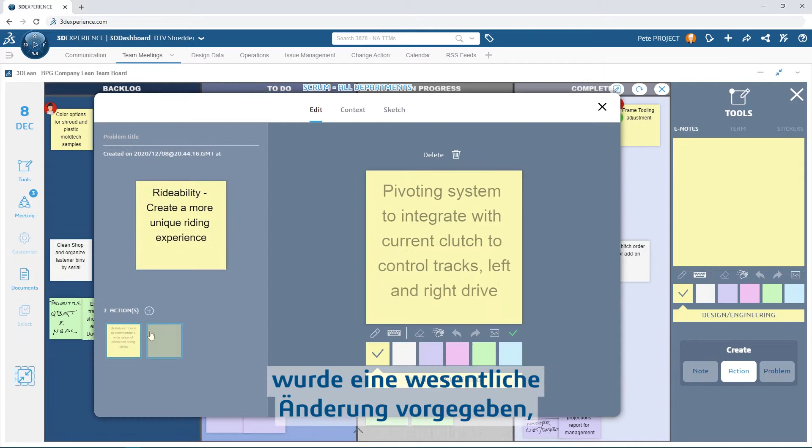During the team's most recent design meeting, a major change had been presented, challenging the team to incorporate a more unique rider experience. This change removes the current steering controls through the handlebars and moves the input to the rider's feet, giving a true skateboard feel to the shredder.

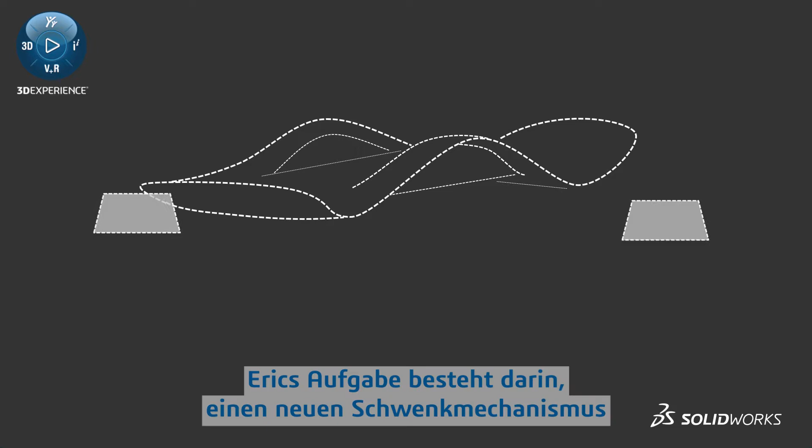Eric's task is to assemble a new pivot mechanism, along with a connection and adjustment system to engage the left and right drive clutches. Let's see how the power of SOLIDWORKS assemblies speeds through this process and ensures the new steering control system works flawlessly.

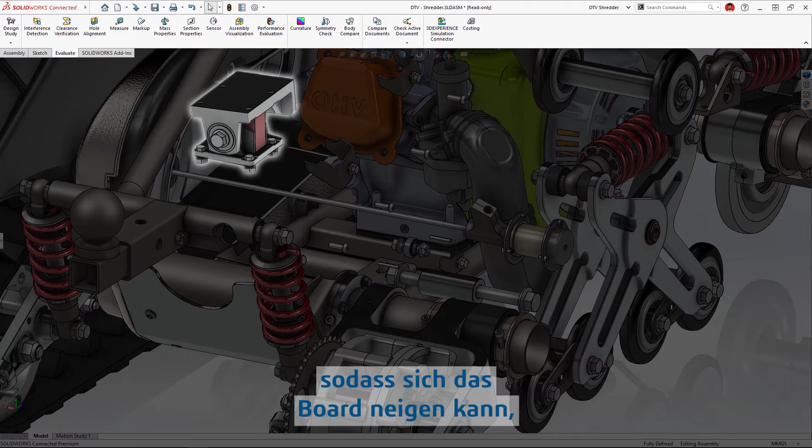We catch up with Eric after he's already created the steering truck mechanism that allows the board to lean and the push rod assembly that controls how much power is being delivered to each track, which steers the shredder left and right. Now, Eric's job is to figure out how to translate the rotational motion of the steering truck to control the linear actuation of the push rod.

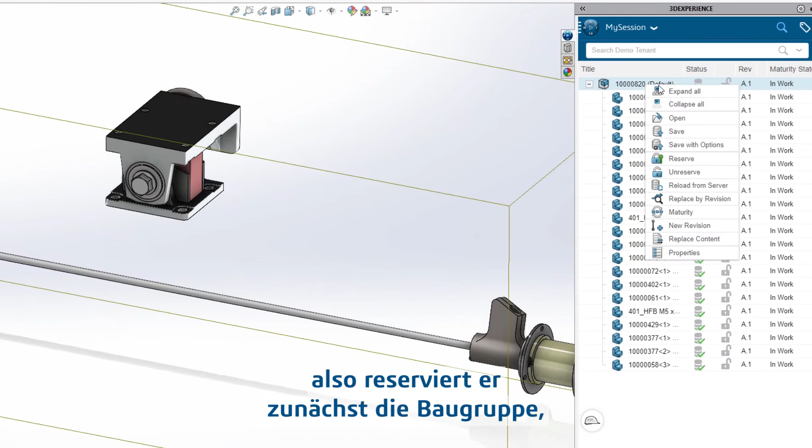He'll be making changes to the design, so he starts by reserving the assembly, since he doesn't want to step on anyone else's toes in the process. In a previous project, Eric used a tie rod assembly for a similar mechanism, so he does a quick search in DTV's cloud library on the 3DEXPERIENCE platform. He can see that there's a few sizes to choose from, so he'll go with the 170mm tie rod for now.

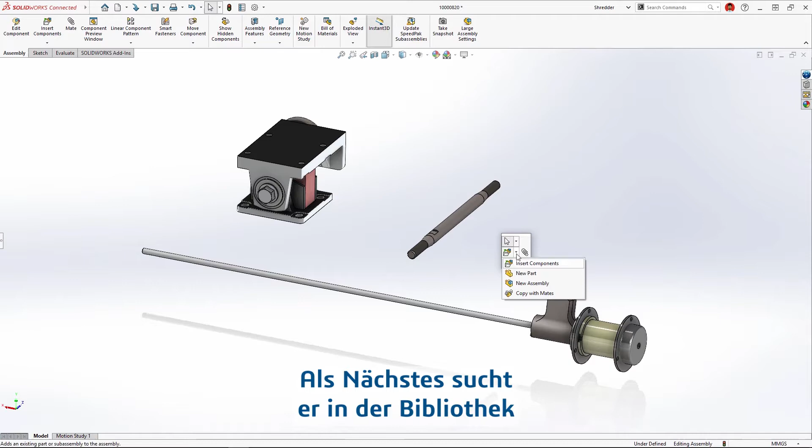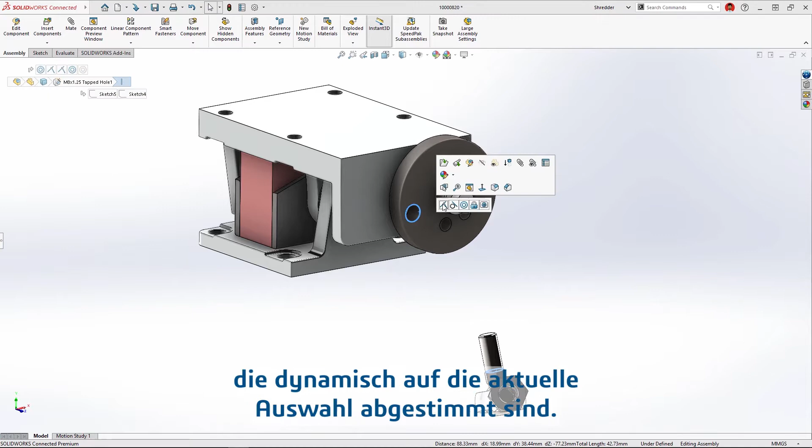Next, he searches for a spherical hinged tie rod end in the library as well. He needs one of those on each end, so he makes a quick copy. Now to assemble the rod end to the steering truck. By clicking two circular edges, the QuickMates toolbar gives him mate options that are dynamically tailored to what he's just selected.

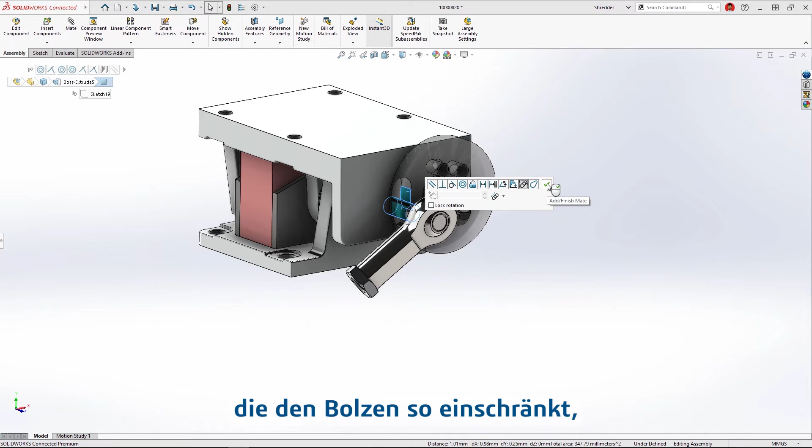By making the adjustment wheel transparent, he can now click the cylindrical face of the rod end stud and an inner face of the curved adjustment slot. SOLIDWORKS QuickMates presents him with the slot mate option, which will constrain the stud to only be able to move within the limits of the slot.

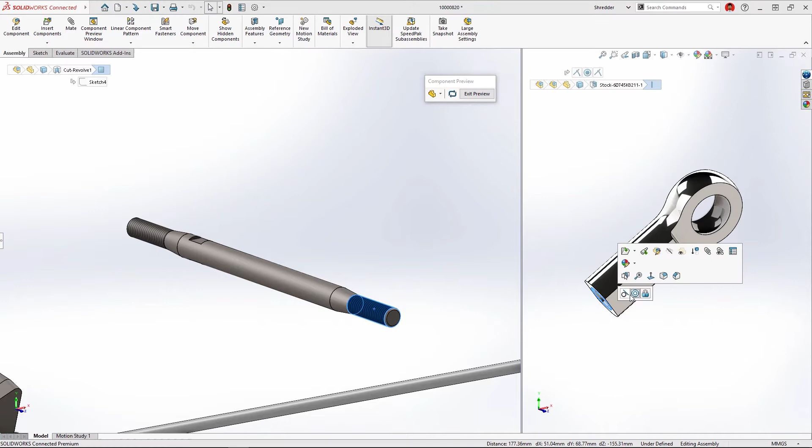For the next pair of mates, he knows that he'll need to have access to a few small internal faces of the rod end to mate it to the tie rod. By using Component Preview, he can rotate the rod independently in its own window, while the rest of the assembly stays put in another window. The coincident and concentric mates are done in a snap, without having to move and rotate the assembly around, searching for the right faces or edges to click.

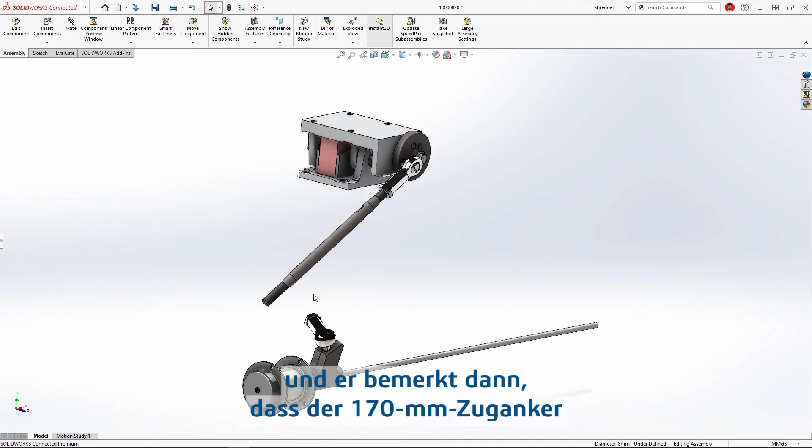Moving on to the lower rod end, he mates the stud to the push rod assembly and then notices that the 170mm tie rod is just too short for this application. He changes the configuration on the fly and uses Component Preview on the lower tie rod end to finish mating the tie rod assembly in place. Testing the mechanism, Eric can see it's working just as he had hoped, but knows that it'll need to be tuned to ensure proper function.

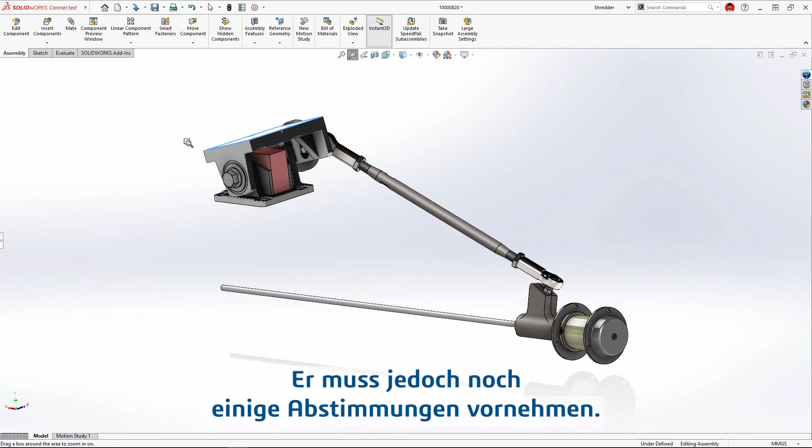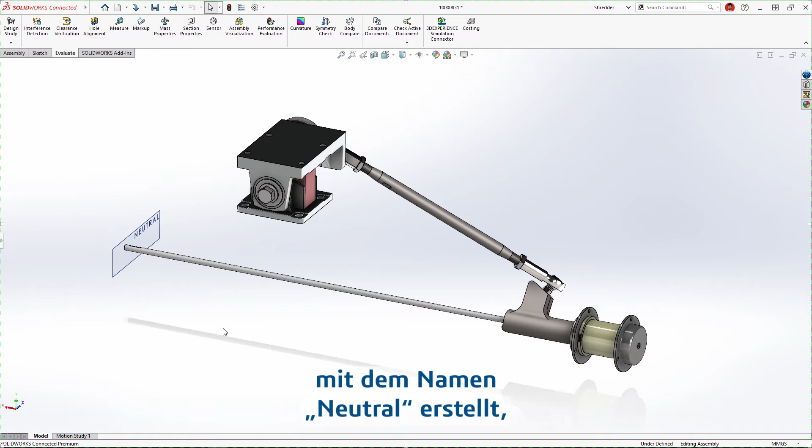He adds a limit angle mate to the steering truck, giving it plus and minus 15 degrees of rotation. At the center position, the end of the push rod will need to be right between the left and right drive clutches, giving equal power to both tracks, making the shredder go straight. Eric had previously created a plane called neutral, which identifies this center position.

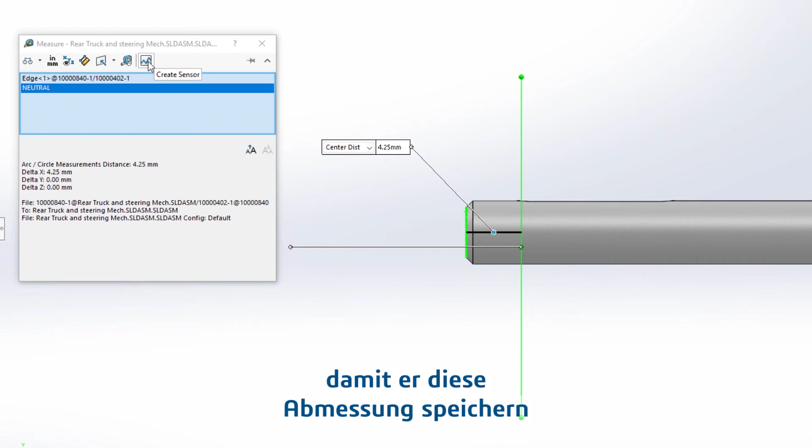By zooming in on the end of the push rod, he sees that it's too long, so he uses the measure tool to measure the distance from the end of the push rod to the desired neutral position. It appears that the push rod is 4.25mm too long. Eric creates a sensor so he can save that measurement and access it at any time in the future as the design changes. He quickly changes the overall length of the push rod by adding a simple math equation to the dimension field, ensuring the length will be perfect.

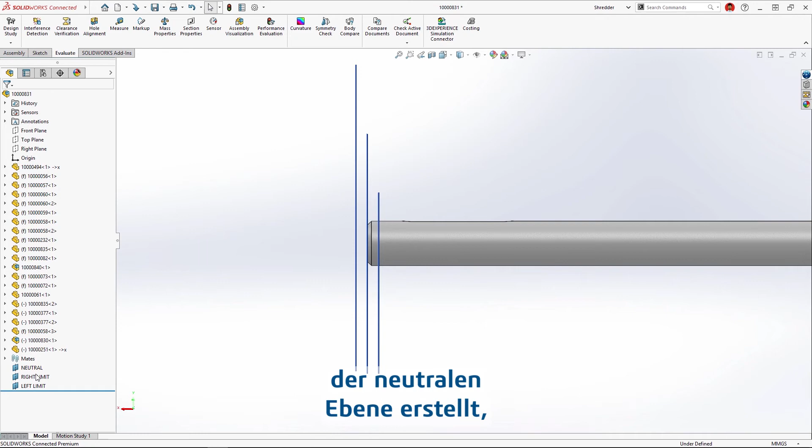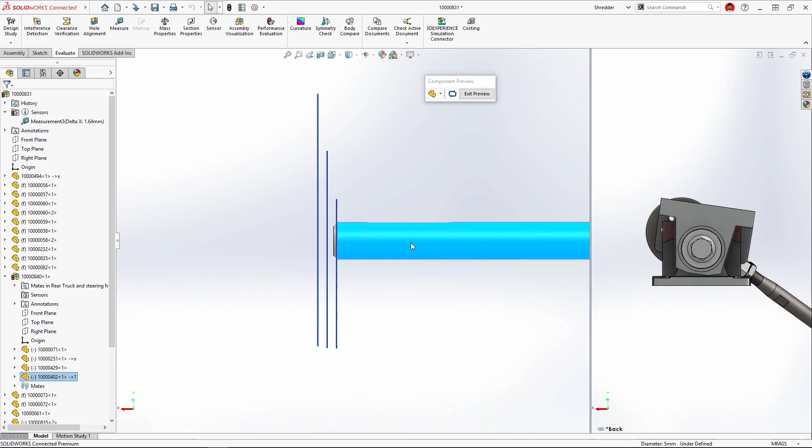Eric had also created two additional planes, 1.25mm on either side of the neutral plane, which correspond to a hard left and hard right turn. He opens the sensor he just created and moves the push rod through the entire range of motion. Eric can see that the end of the push rod comfortably hits the turning limits and is beyond the 1.25mm specification. Without building and testing a single prototype, Eric developed a mechanism that'll control steering by simply leaning on the board.

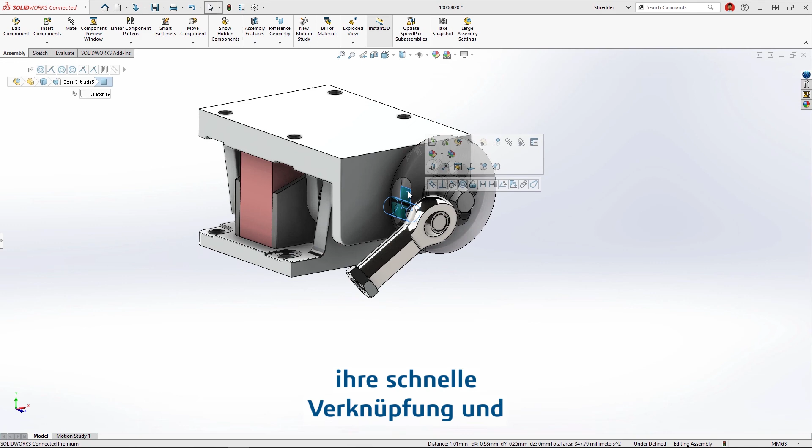Finished with the steering mechanism, Eric unreserves the assembly and saves his changes to the cloud. By reusing parts in DTV's shared cloud library, quickly mating everything into place, and virtually testing its function, he was able to tackle this tough challenge with ease.

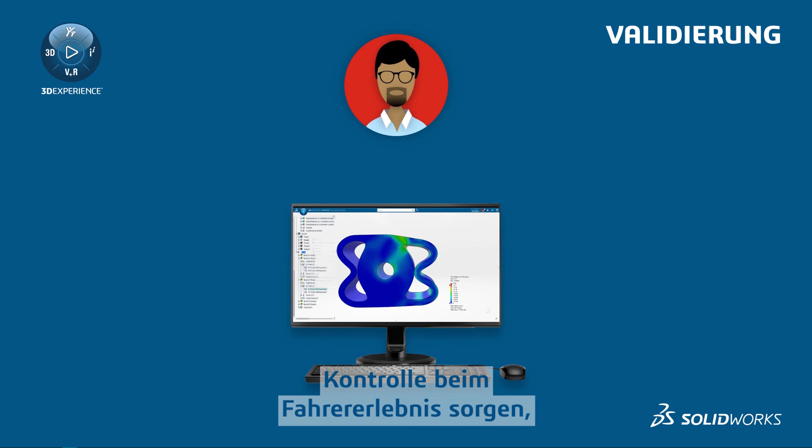The steering system is working great, but Eric still has work to do. His next mission is adding comfort and control to the rider's experience by tuning a bushing that'll add proper resistance when the rider turns the board. Stay tuned as Eric uses design validation to virtually test the steering bushing and maximize the rider's control of the vehicle.